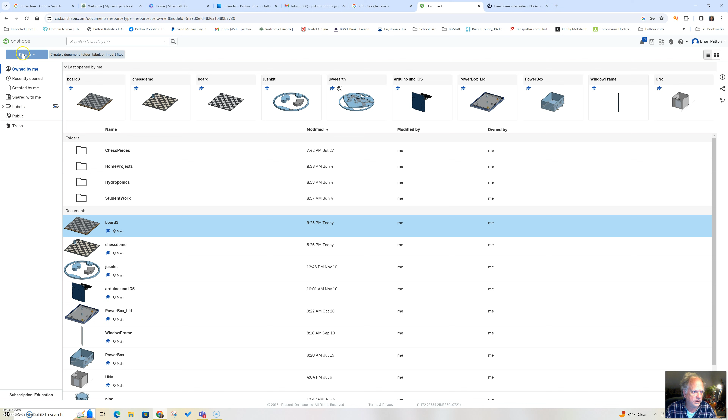I'm going to go ahead and make a new document. I'll call it ChessBoard. B-O-A-R-D, I can't spell today. I don't know how many I've made, I'm going to say 5. All right, let's create it.

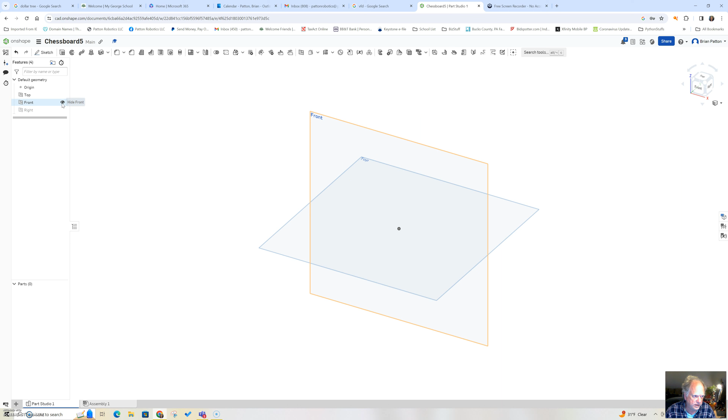Okay, once again, it's a board laying on the table, so I think I'm going to work on it top down. I'm going to hide that, take a top down view, grab a sketch, put it on this top. Okay, we are ready to start drawing our board.

I think what I want to do is start with just a corner rectangle, and I'm going to throw it down there. I think I want my chessboard to have pieces that are like 20 by 20 millimeters. At this point, we can do a number of different things. I could just start copying lots of these squares and then extrude them out.

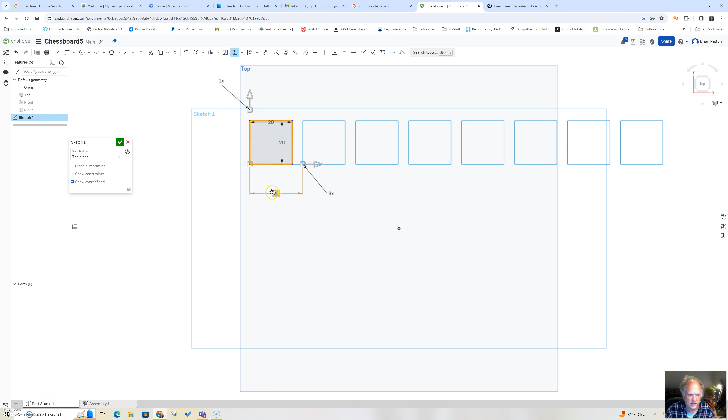In fact, I'll show you real quick, there is a tool if you haven't played with it yet. I can simply take this linear pattern tool. I can say that I need 8 of these, and then I need them to be 20 millimeters apart. Right there you can see how quickly I can make my 8. I can make another 8 down, and I have my 64 squares in no time at all.

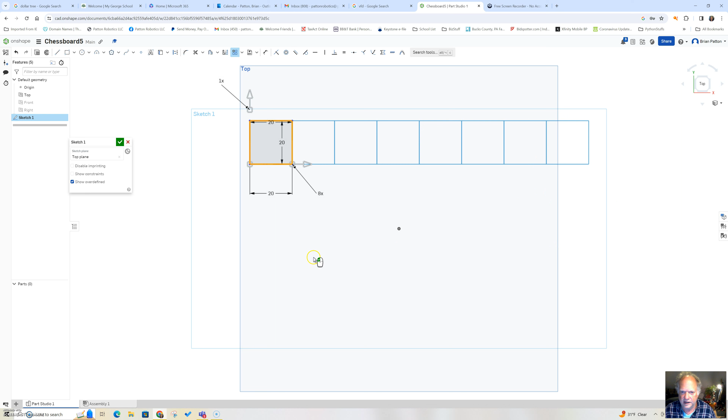But then what happens is as I extrude them, they'll come up as individual parts, which is fine, but then they'll be individually colored, and I'll have to go select them, and it's kind of a hassle to colorize them. So I think what I'm going to do is extrude them first.

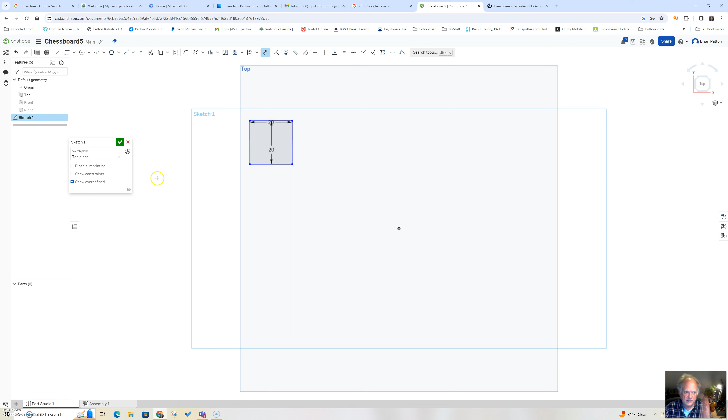And I've lost one of my measurements, let me put that back. And we need that to be 20 millimeters. Okay, so I'm actually going to call it done. I've got a square, and now I'm going to extrude this square.

I think I'll make my tiles 3 millimeters thick. I'm also going to go over here to properties or appearances, and I don't want to deal with these sort of blues. I think I'm going to go with these shades of gray, this sort of brownish gray. So I'm going to make this my lightest one, like so. All right, I'll hide this appearance panel.

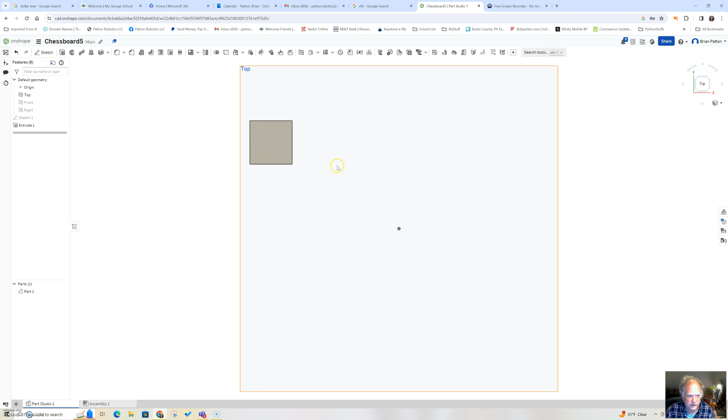So now let's go ahead and draw another tile, and I think I'm going to do it as a new sketch. Select my drawing surface, grab my corner rectangle, go up here and make sure it snaps, and bring it out. 20, enter 20. Okay, so now I've got my nice square. I'm done with that, and I'm going to extrude this one.

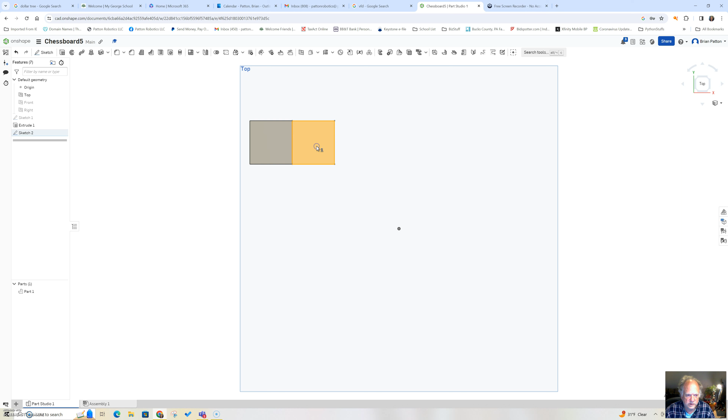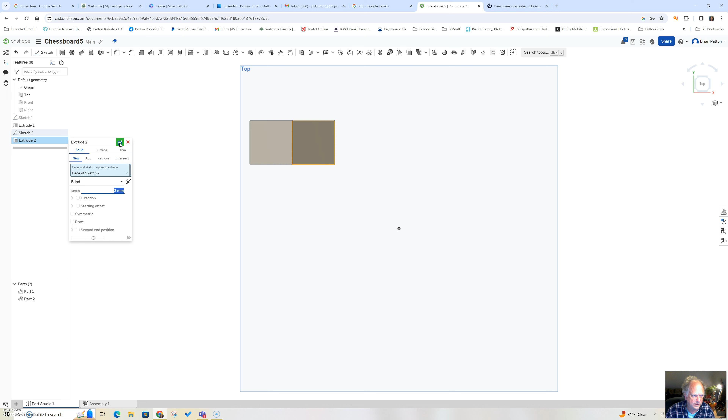Now this is important, this is worth noting. I'm actually going to make sure, notice how it jumps to add. I actually want to make a new, totally separate piece so I can treat it as a separate color and everything. So I'm going to make it 3 millimeters, but it's a whole new piece. Okay, so I got a whole new part down here.

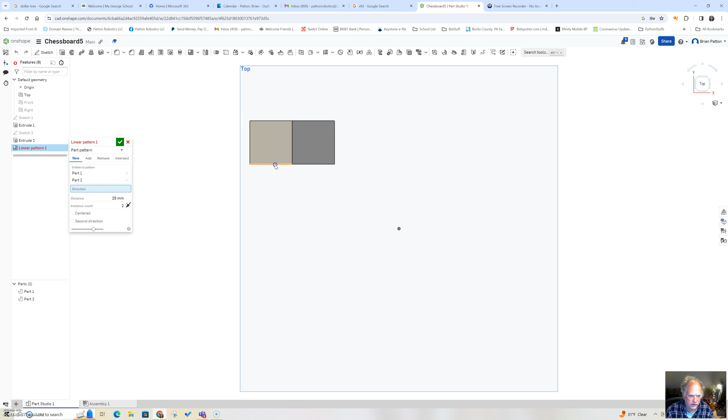And you can see now I have 2 of these tiles. So now what I want to do is copy these solid objects instead of my drawing. To do that, I simply select them, and then use my linear pattern tool. It's asking me which direction. I want to choose this axis, and then I want to move them over. There were 20 each, so I have to move it over 40, and I want a total of 4 copies of it. And there you have it.

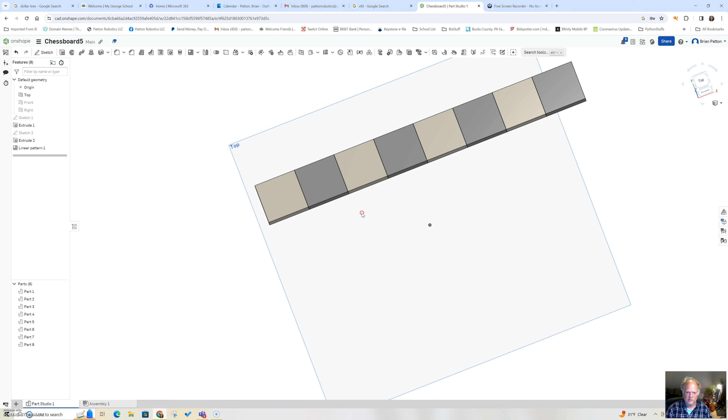Okay, so there's my first row, and they're all uniform, all the same color, and it all looks great. So now let's take these two, we'll do the same thing again, but this time I want it to move down on this axis, and I want to go down 20 millimeters.

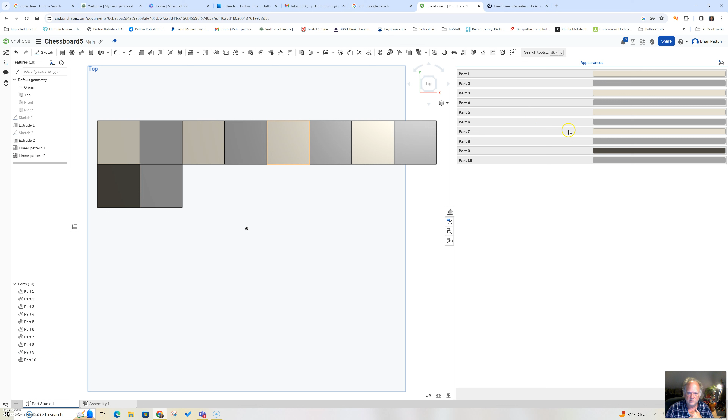The thing is that I need to switch these colors around. If I highlight this, it shows up as part 9, and that one shows up as part 10. So let's go to our Appearance panel. Let's choose part 9, double click it, and we need it to be the dark color now. Then we're going to choose part 10, double click it, and let's make it the light one. Okay, and we'll get that down.

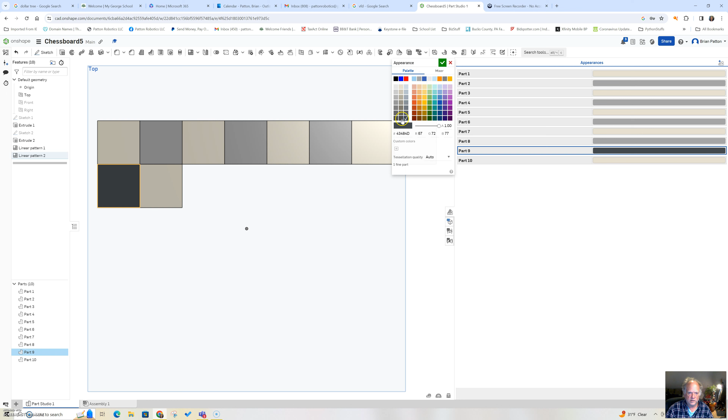So now we can take, oops, I wanted to make that a different color. Let me do that, I grabbed the wrong one. Hold on a second, let's go back here. I want this to be... what did I choose? I could have sworn I was there. Is it this one? Hold on, I've lost track of my color. Let me pause this for one second. Sorry about that, but I lost track of which color I was using. So now I've got the right color.

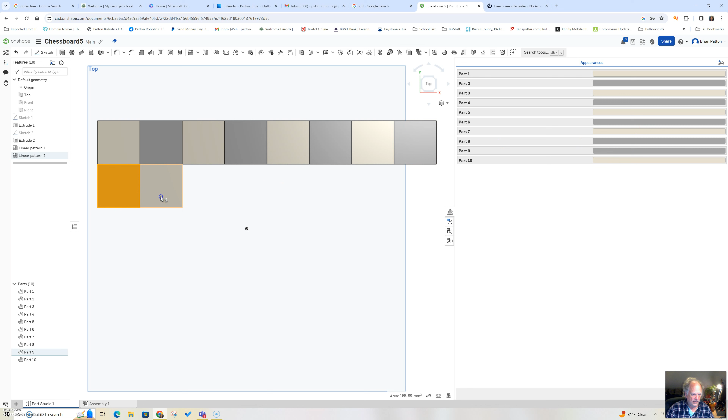So now I'm going to select these and do the patterning again. Move this down, select my direction, and then I want to follow along that axis there. I want to move it 40 millimeters, and I need 4 of them. And then there we go.

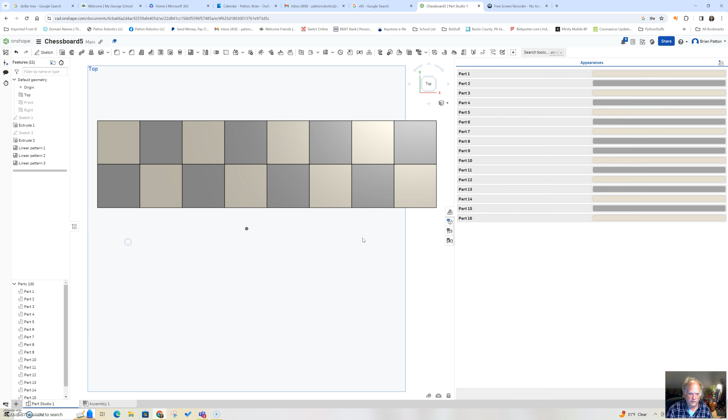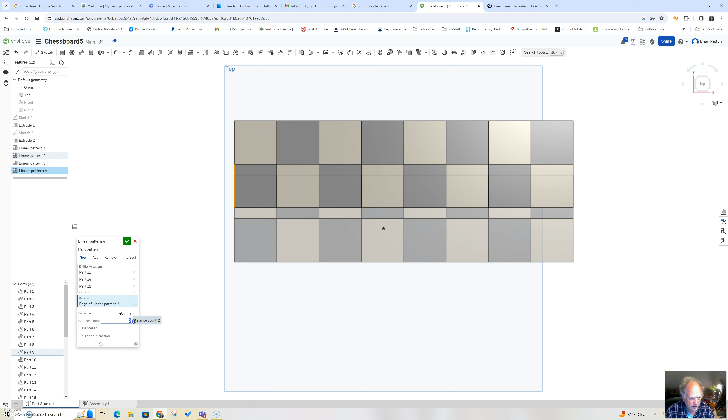So let's get that out of the way. Now all I have to do is select all of this. Once again, we're going to use our pattern. We're going to select the axes right here, and then I want to go 40 again, and I want 4 of them. And there you have it.

So now we have the basic playing field, but we still want to put that cool border on the outside of it to make it a more finished product. So I'm going to go to my top view.

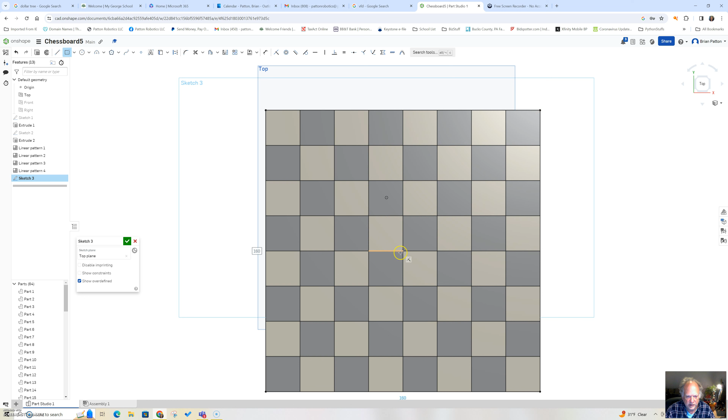I think I'll create another sketch plane on the top, and in this case I'm going to use the center point rectangle. I'm going to go right to the center, and click out to the edge, and do it again. This should be 160, because there are 20 each, so that's 160 by 160. I think I'm going to bring it out, let's go like 175 by 175, like so. And we are done with that.

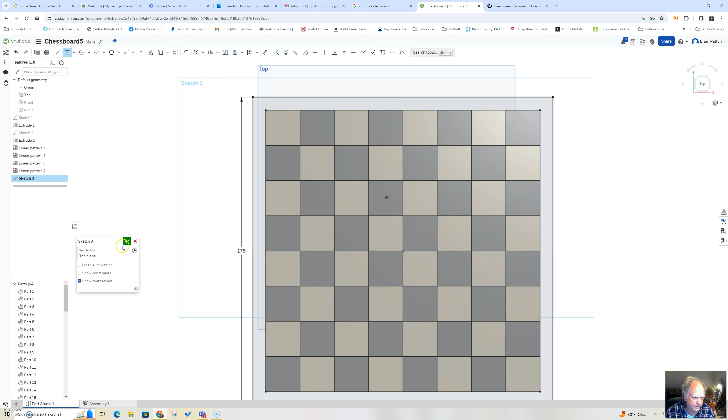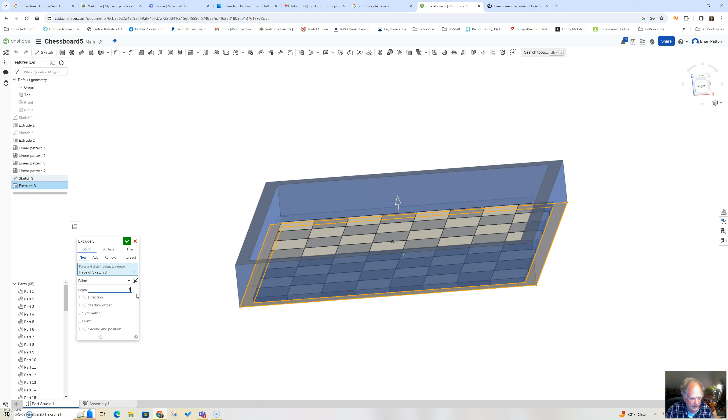Okay, let's bring that down a little bit. So let's select this, and I do want to show you this - this is another new trick I'm going to show you. I'm going to extrude it, but I actually want to go not in just one direction. I certainly want to go up so that my tiles are level with the surface, but I also want to go down. So I want to do a symmetric extrusion, extruding in both directions. And I'm going to say OK with that. There you can see I've extruded in both directions.

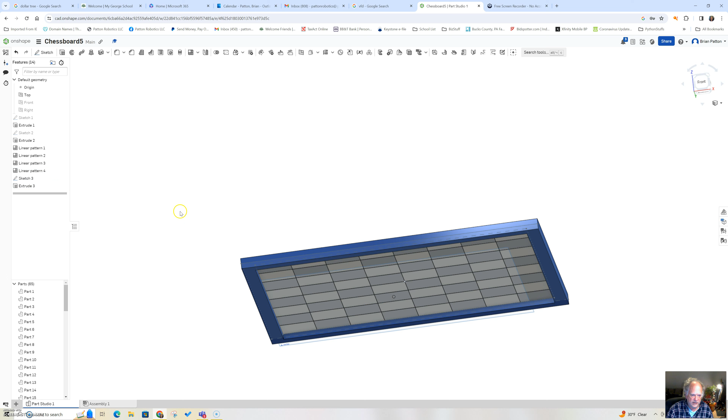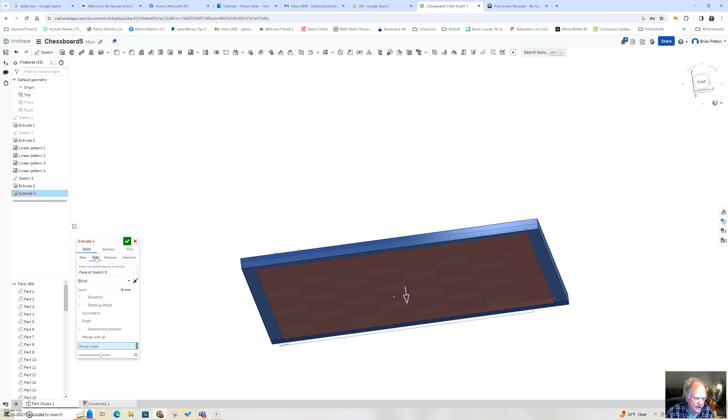Now I still have this sort of hollow underneath there. I want to hide this with a solid piece. So I'm going to make sure my sketch re-shows, and select it in such a way that if I get right in the middle, you can see how it's taking the greater rectangle. I'm going to select that, so that's the entire bottom. I'm going to extrude it, go down 3 millimeters, and I want to merge it with this layer right here, so it's going to make it a solid.

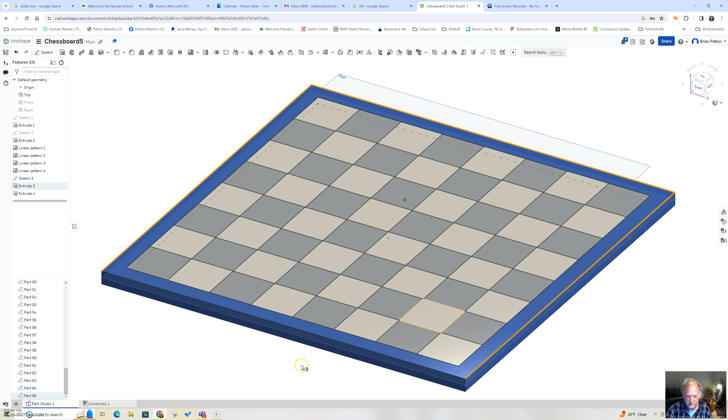Okay, and there you have that. And the last thing, just to finish it off nice, let's go with a nice trimetric view. I am going to select this edge, that edge, that edge, that edge, and I'm going to use the fillet tool, and bring it down - I guess we'll go down 6 millimeters.

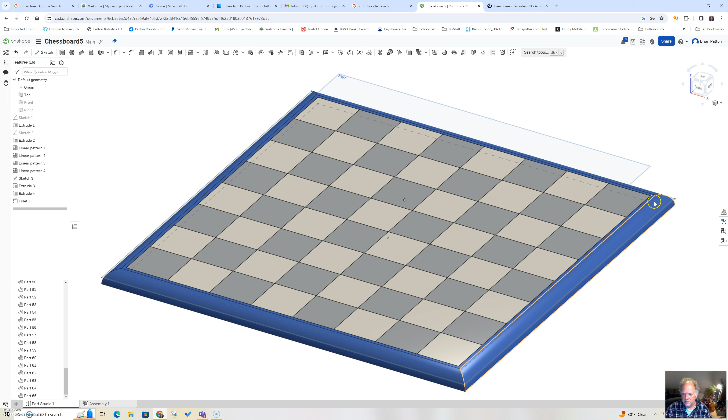Like that. And last but not least, I'm not particularly fond of the blue. I'm going to scroll down to it, find that blue piece, double click it, and I think I'm going to go with something rather contrasting, like a brown of some sort, maybe like that. And then say OK, and we'll get this out of the way.

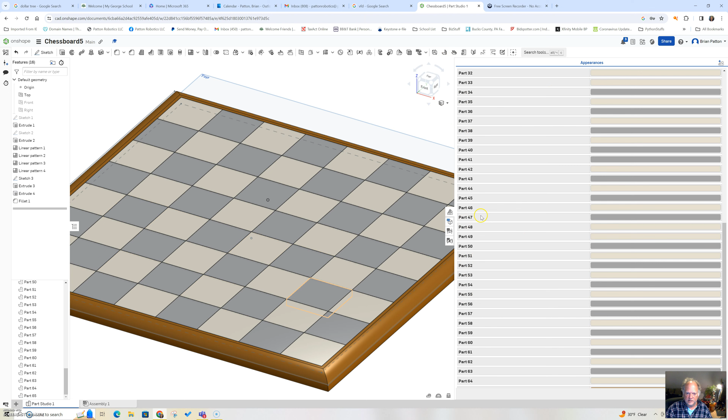And there you have it. We can hide that top plane. And now you can see you've got just a beautiful chessboard, all smooth, rounded, fully finished. Looks great. So I'm going to put that right there.

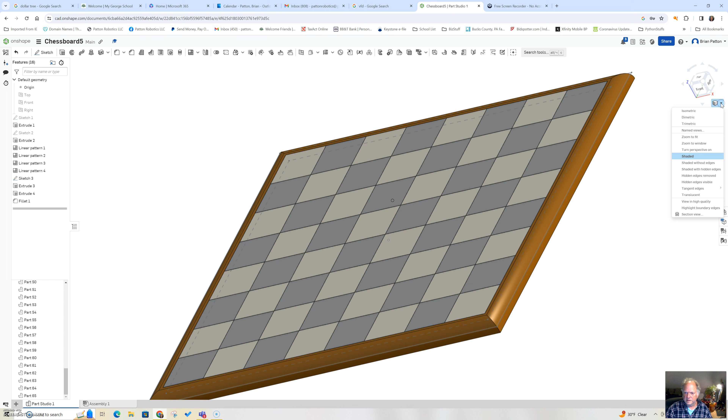Alright, awesome. So you're going to need this board to be able to do the next thing, which is to be able to work with an assembly. So hopefully you can reproduce this, and I will see you again soon.